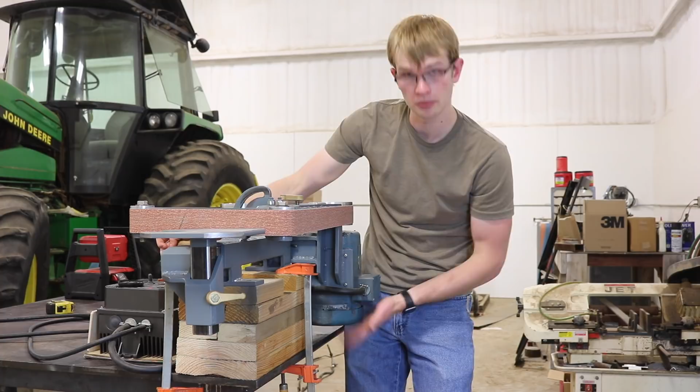I think it's time I build a dedicated stand for it. The signature feature of this grinder is that it can serve as either a vertical or a horizontal grinder, but because of that, the motor, which is direct drive on the drive wheel, has to swing down, as you can see here. So it needs some extra height in here.

About 3 options to deal with this. One is to just set it on top of blocks like this, although you could go with a little more professional blocks than just a stack of 2x8s. You could make the legs on the grinder longer so that you can mount directly, or the solution that I'm going with is to custom build a table that's notched out so that the motor has a place to swing.

Just to give you a quick look at the construction before we get started, it's going to be a front and back frame, nearly identical, just that one of them is notched for the motor. They're connected by a bunch of cross members.

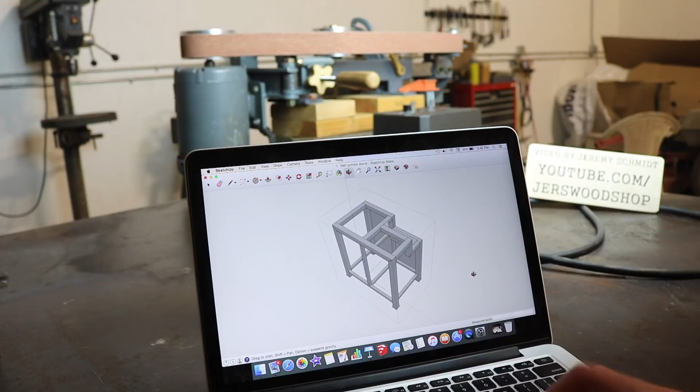On this corner where the notch is, that'll be skinned to keep dust out, and the back will also be skinned to add rigidity and keep dust out. The top will have a piece of 1/4-inch plate, and then in the front there will be 2 banks of wooden drawers. I'll mount my frequency drive up on a pedestal, as you can see here.

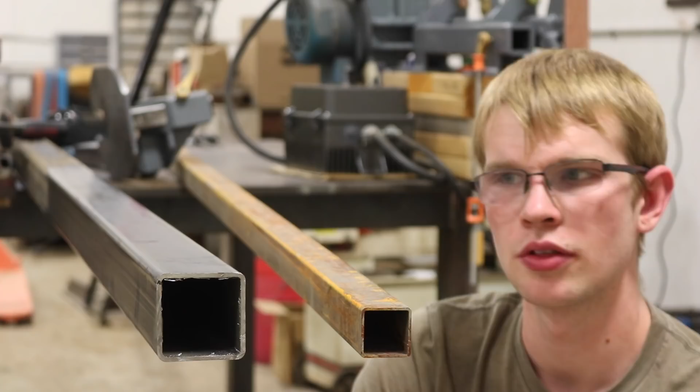The tube used for the main frame is 2.5-inch square tube, 1/8-inch wall, and then the secondary parts are made out of 1.5-inch square tube, 14-gauge wall.

To figure out how long you need to cut the legs, take the height of your table, in my case that's 40 inches, and subtract the thickness of the table top. I'm going with 1/4-inch plate, so that leaves me with 39 3/4, and then subtract the thickness of the feet on the bottom of the legs, if you're going to have any. I'm going to weld 3/8 plate on the end of my legs, so that will leave me with 39 3/8.

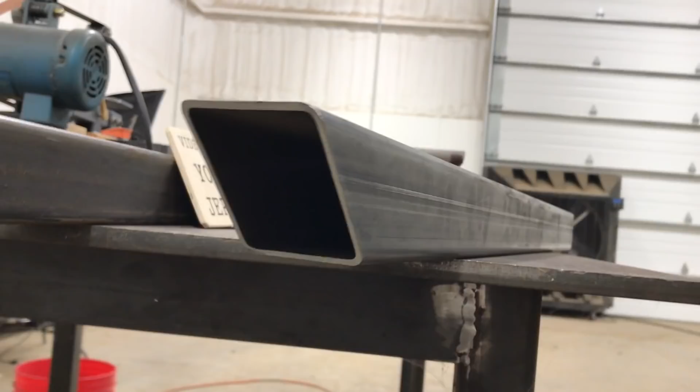After truing that up on the belt grinder, I've gotten it down to exactly 39 3/8. 3 of the 4 legs are 39 3/8, and the other one is 7.5 inches shorter. That's the one that goes on the corner with the motor notch, which is 7.5 inches deep.

Across the top here, I'm going to put a 38.5-inch long piece, and then down the middle there will be a smaller tube between the 2 banks of drawers, and then another tube across the bottom that'll keep these 2 legs from bending in and out.

Now the back frame will be mostly the same, but just a little different because the 2 don't line up. So it'll have to be a jogged piece across the top, and then the same piece down the middle and across the bottom.

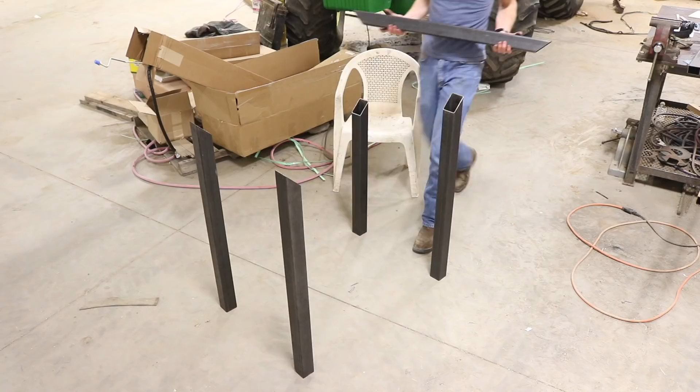I'm going to go ahead and weld up this front frame right now. Where these corners come together, if I just weld on top of that, I'll basically just get a little pile of weld. That's not ideal. So I'm just going to take and bevel these inside corners. And now I have a V-notch to weld in.

I'm taking my time and measuring to be sure the legs are parallel and square to the top.

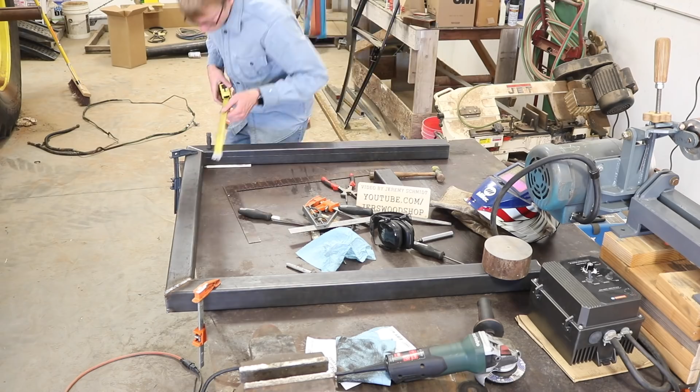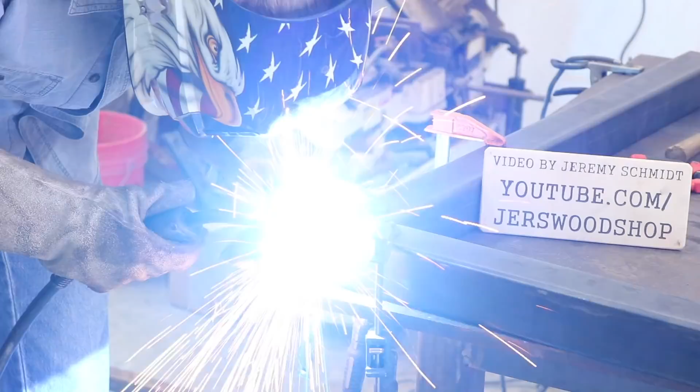Since I welded these inside corners first, the legs warped inward just slightly. They're about a 1/16 inch closer together at the bottom than they are at the top. So I cut this brace that goes across the bottom. I cut it so that it just fits at the top. Since that's the right length at the top, if I just force it in down here at the bottom, then that'll push those legs back into parallel.

So I just clamped these ends together with a piece of scrap metal to make sure that these faces are flush. Same thing on this end. And then I've checked to make sure it's the right distance down from the top and that everything's square. So we're ready to weld this up.

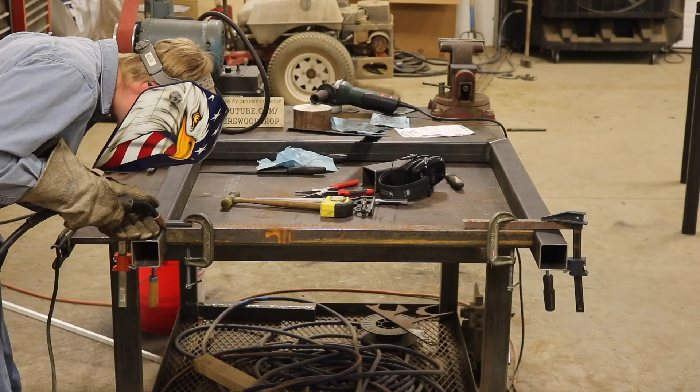Now the distance from the top of the bottom tube to the bottom of the top tube is 31 5/8. So that's how long I cut this piece, which goes here in the middle. It's important to make sure that this piece is exactly centered side to side.

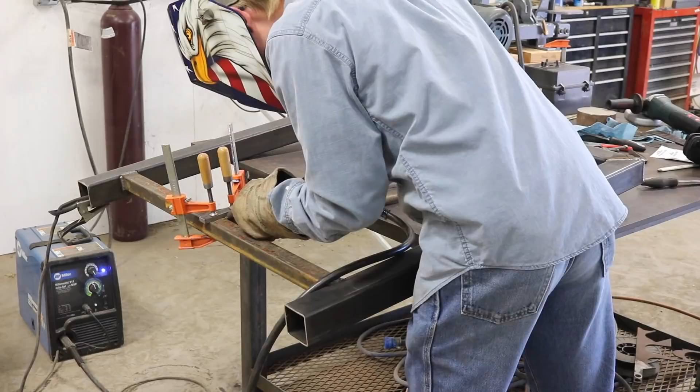Okay, that's the front frame all done. Now, like I said, I will be adding some feet on the bottom, but I'm gonna leave those off for now because they might get in the way. I'll add those later. You can see here where the two banks of drawers will go. And now let's move on to making the back frame.

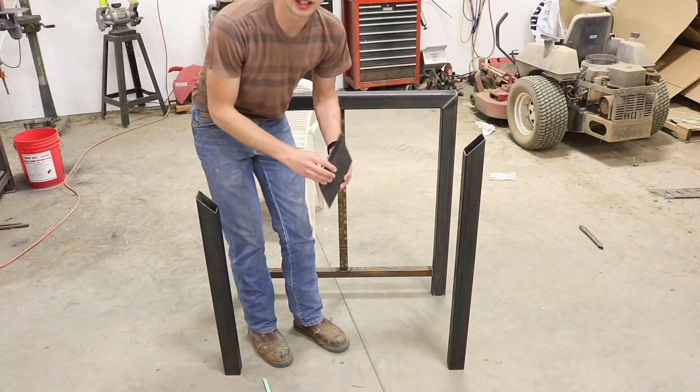I cut out this center jog piece, which is 7.5 inches from the top to here. Again, since the motor notch is 7.5 inches deep. You'll notice something about this. If I put it on top of this one, it makes this leg the same height as all the others. So it's sort of like I've just cut this piece off and scooted it over to here. And now I just need to make the piece to fill this in and this.

The distance from here over to here is going to be the same as the distance from this tube to this tube, since the same drawers that fit between these need to fit between these. This is 16 inches, and with 2.5 inches extra on each end, the top piece that I need to cut for here is going to be 21 inches on the long side.

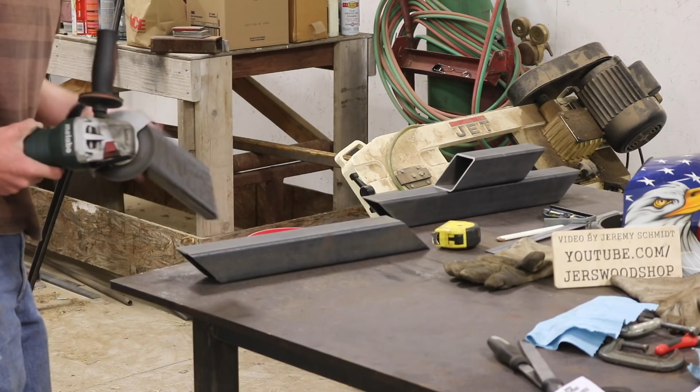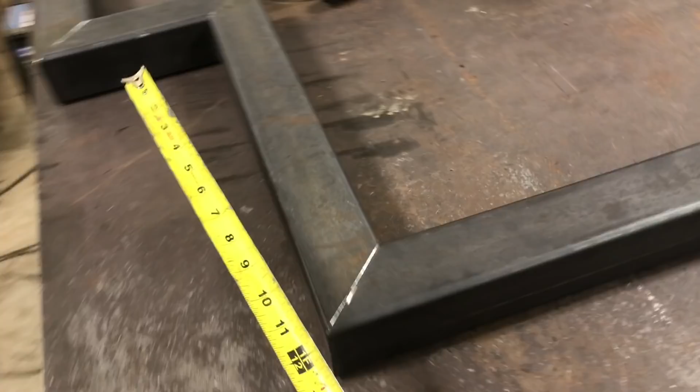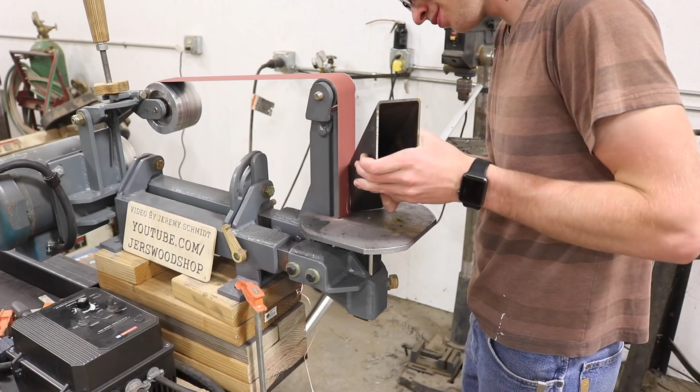So just to run through the dimensions of this one more time, this piece is 17.5 inches, and it'll be 20 inches overall. This piece is 7.5, 10 inches overall, and then this is 21 inches overall. The inside here is 16. And here again, I'm beveling those inside corners to give me a V-notch to weld in.

So now I just need to put in the 1.5 inch tube across the bottom and up the middle. Now the middle one is going to end right here instead of going clear up to the top. So it's 7.5 inches shorter than the one in the front. Again, I welded the inside corners first, so I have to jam this piece in.

So this is the piece that goes here in the middle. So I'll use that on this end to get the height right. And then once I have this right, I can use this dimension to make sure this end is the same. That way it'll be straight.

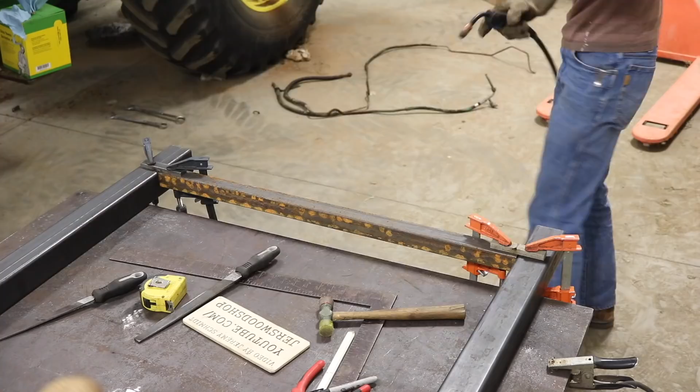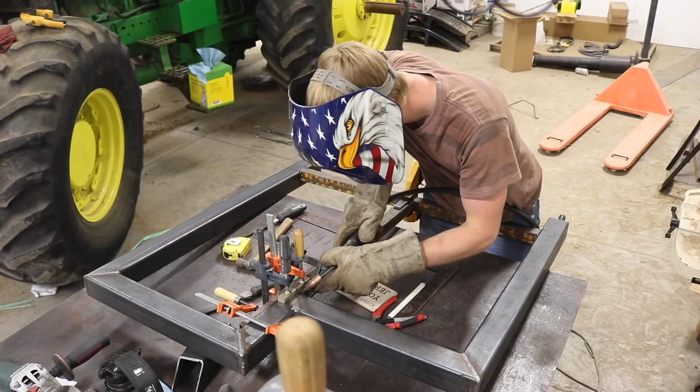So I have this end clamped up so that it's flush across the top and across the side back here. And then this end is centered and clamped so that these two are flush. After a few tack welds, I checked both sides to be sure they are 16 inches wide.

Notice that the 1.5 inch tubes on the front frame are flush with the front, but on the back frame, they're flush with the back. So now we're ready to connect those, so I just need to cut a bunch of 20-inch long cross members for the top and bottom.

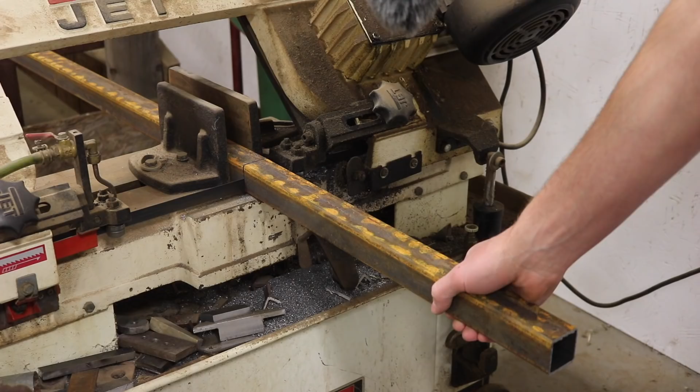So the two larger pieces go here and here. There will be another one going here, but that has to have a jog in it, so I'll need to custom fabricate it. The two smaller tubes go right here and right here. And then there's two of the smaller tubes that are cut slightly longer to go here and here. These are necessary to support the plywood panels that'll support the drawers. You'll see that in a bit.

I want to make sure that the front and back frames aren't twisted relative to each other when I weld these in. It'd be best to have a precision level, but I don't, so this is just a regular old level. It'll be close enough for this. It should be within a 32nd of an inch over the length.

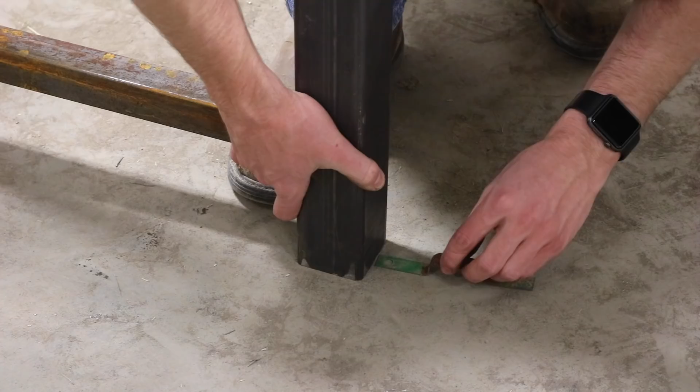Here I'm checking the diagonals to be sure that I have it sitting square, and then double checking the ends to be sure they're still 20 inches apart. All right, that's all nice and square.

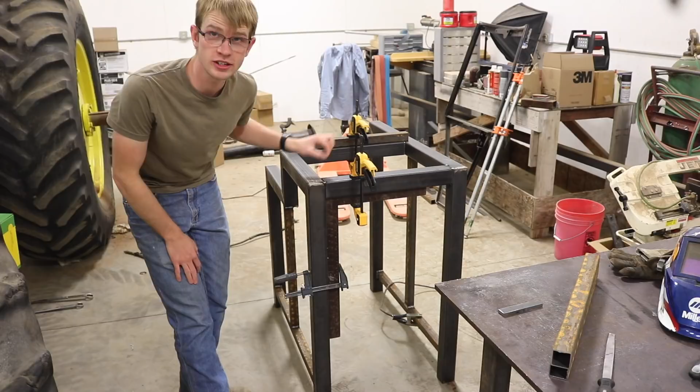I'm just putting a few tack welds here and there and then checking everything for square again. The more square this is, the better, because if it's out of square at all, the drawers probably won't work as well. It warped out of square just a little, but by putting diagonal clamps across it, I was able to pull it back into square.

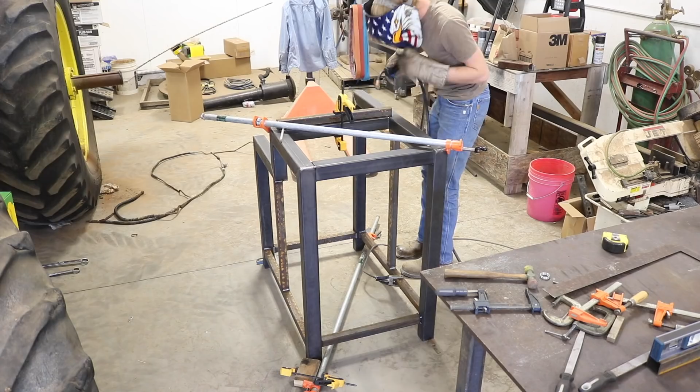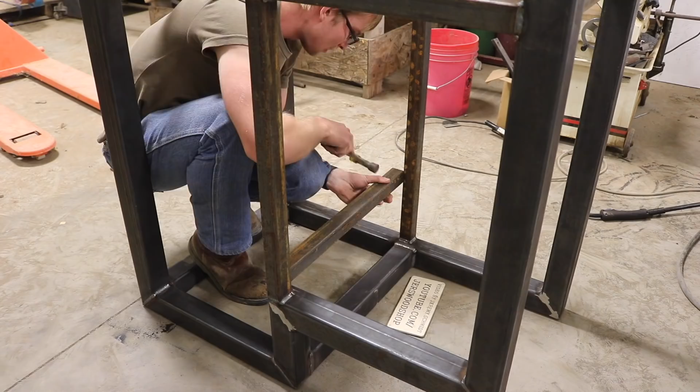So I've got these bottom ones tacked in place, and I'm gonna now tack this one in, and with that, it should be rigid. And just so you know, I am welding all of this stuff completely solid. I'm just not showing it because it takes too long in the video.

Just to help you see what's going on here, you can see there's a cross member right in the middle between the vertical in the front and back, straight across there. And there's another one between them right against the bottom of the jog. And those are there to screw plywood panels into.

We're also going to screw plywood panels into these sides. So that'll screw into the big tube on the top and on the front and back, and then into that little tube on the bottom.

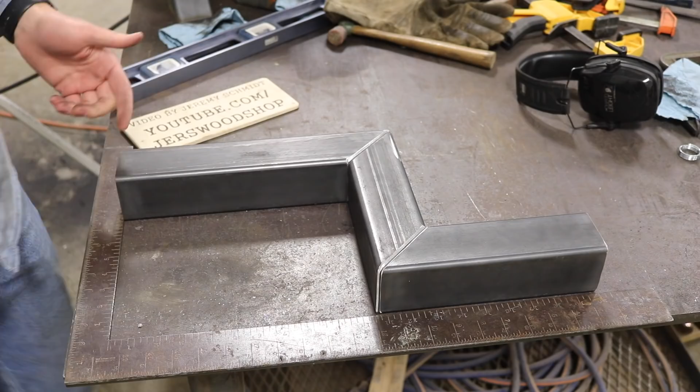So I'm working on this jogged cross member now. I've already cut all the pieces. The overall length this way, of course, is still 20 inches, just like the other cross members. And the height of this is 7.5. By that I mean 7.5 inches offset. It's 10 inches overall. This piece is 9.5 inches overall. And this piece is 13 overall.

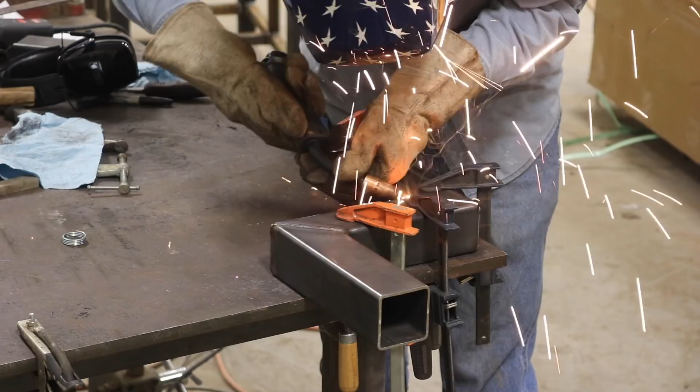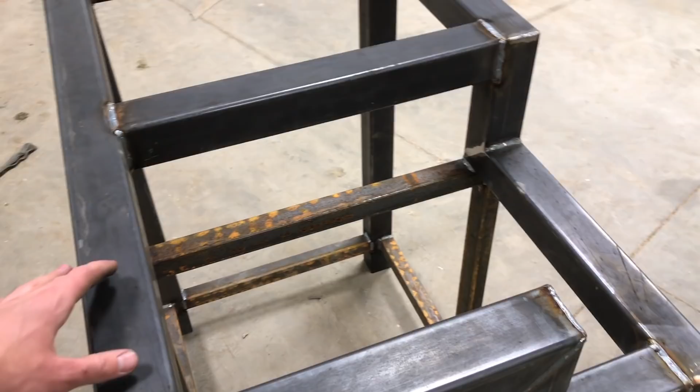The front foot of the grinder is going to sit right here, and then the back foot sits about here, so there needs to be a cross member between here and this tube. That cross member will be 15 inches long.

So now you can see the motor notch. If I put a plate on that side, a plate on the bottom, and a plate up this side, that will complete that. But there is one more piece I'm going to add here, like so. That's mostly just for looks.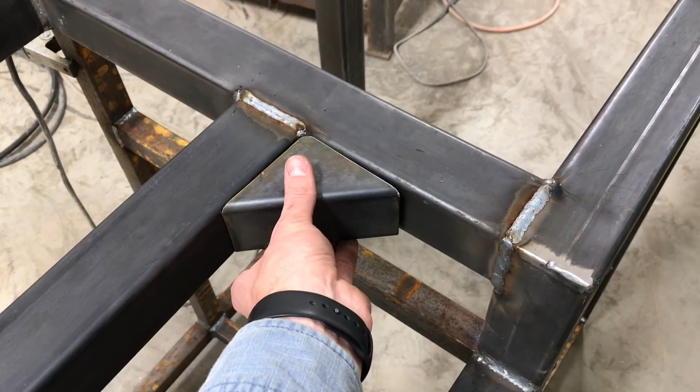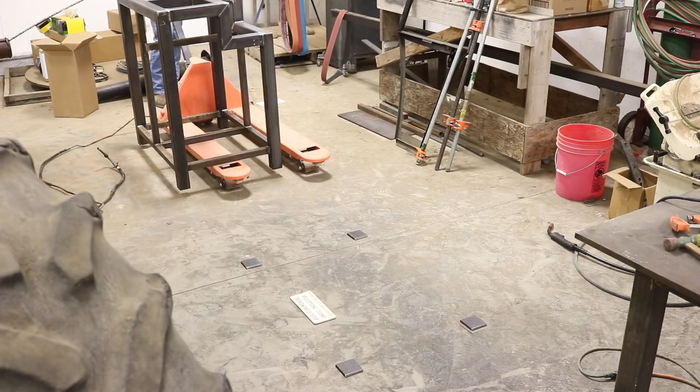I ground my welds flat everywhere where there will be panels, so that includes the inside where the plywood goes, the top, and the back. So I'm welding these 3-inch square feet on the bottom. If you wanted, you could certainly put leveling feet on this or casters. Just cut these legs a little bit shorter, weld them on the bottom.

In my case, I've got a way to move it, as you just saw. I don't like leveling feet. I prefer to just kick a shim under the corner. I can already hear you asking the question, why don't you like leveling feet? Good ones are expensive, cheap ones are wobbly, and pretty much all of them require tools. These are dirt cheap, and it doesn't take any tools to kick a shim under the corner.

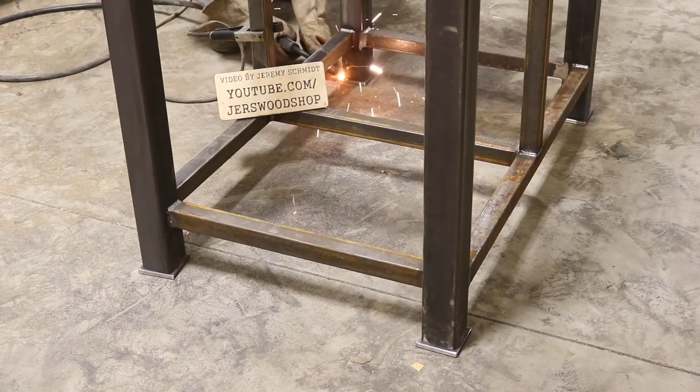So all the feet are attached. Now all we need to do is put the skins on the back and in this notch. This opening is 31 5/8 by 16. So I'm gonna cut the sheet to 17 by 32 5/8, so it overlaps a ½ inch all the way around. Then this one's also 16 wide, but only 24 1/8 tall. So I'll cut it to 25 1/8 tall by 17 wide.

Now, you can certainly make this in just one sheet to cover the whole back. I'm just making it in two because of how I plan to use the rest of the material that I bought.

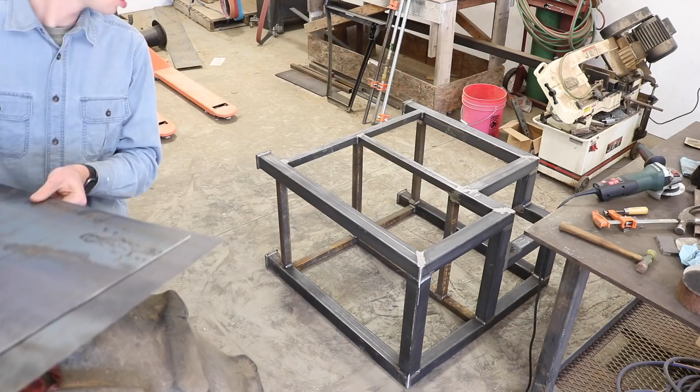To attach these, I could just tack them on all the way around, but that's not going to do a very good job of keeping the dust out. So I could tack them on and then run around it with a bead of silicone. That would keep the dust out, but it might not look as good, so I'm just going to weld it solid. In hindsight, the silicone would have looked better than my ugly welds.

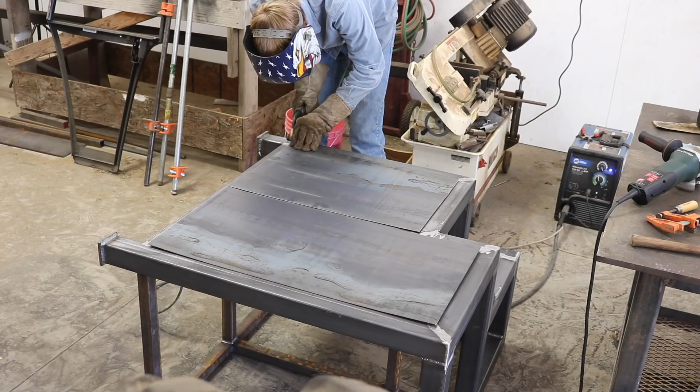Also, if you're just going to tack it on, maybe leave a little gap around the edges or something, because otherwise there's a risk of it vibrating and making a buzzing sound. See, you don't want that sound. Still pretty noisy.

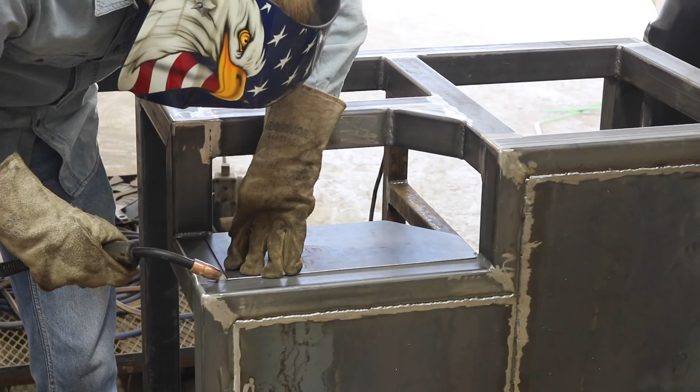So here's the piece I cut to fit in the bottom of the notch. You can see the corners are both cut out a little bit, and those are to fit around the welds. And this profile is the same as this. And I think I'm just going to try to bend a single plate around this. For this vertical piece, I need to bend it here and here.

Now, if I just clamp it in the vise and try to bend it, it's not going to look very good. So I'm going to score that with the grinder first. That'll give me a spot for it to bend. Since I've weakened the plate by grinding grooves in it, there is certainly a chance that it'll crack along those grooves. But I'm just going to hope for the best. If it cracks, I can weld it up then.

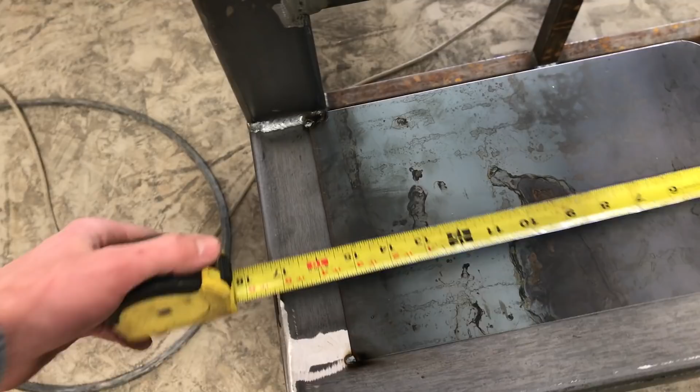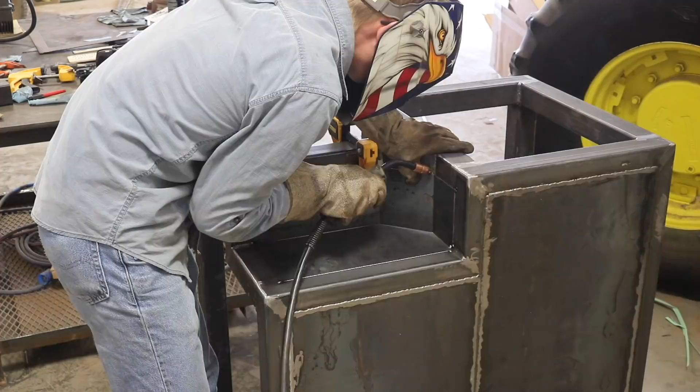This bottom piece is 15.5 by 7.5. This piece ended up being about 20 3/4 along its length before I bent it, and it's 5.5 inches tall. So I'm going to paint this with this Dupli-Color machinery gray, it's called. It's the same paint as I used on the belt grinder.

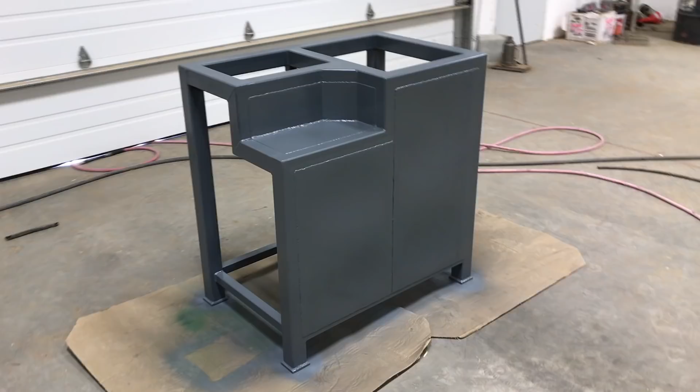As a refresher on how my modular drawer system works, the drawers are all built on a 1.5 inch increment. So this is a 3-inch drawer, this is a 1.5 inch drawer, another 1.5 inch drawer, and in here we have a dado cut every 1.5 inch. So as long as all the drawers are built on that same increment, any drawer will fit anywhere.

My tool stand is going to be built the same way, so I need to cut plywood panels for the sides that have a dado every 1.5 inch. This is 3/4 inch Baltic birch plywood, but any good quality cabinet grade plywood will work fine for this. I cut my 4 panels, and now they need to be notched out in the corners to fit around the horizontal tubes. So I'll go ahead and notch them, and then I'll show you what I mean.

So here you can see why I needed to notch the corners out. And also I chamfered the inside here so that it would clear that weld. These panels are 33.5 tall by 23.5 front to back. And I'm gonna start all 4 panels out at the same size. So the panel that goes here will be identical to this one. And then the 2 that go in this spot will have to be customized a little because of the motor notch.

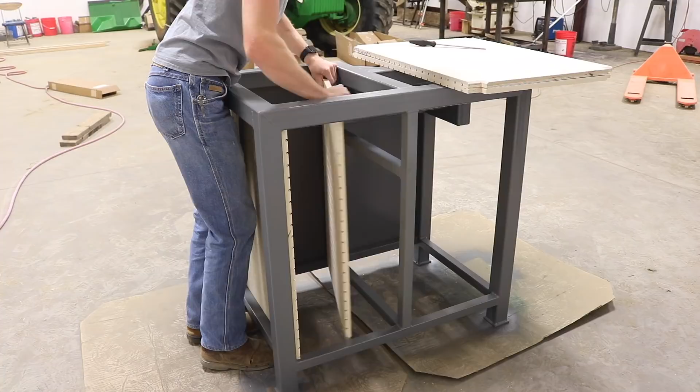Since the notch in the corner is 7/8 inch tall and this dado starts 1 inch up from the bottom, that means the bottom of the drawer will clear this tube by 1/8 inch. And then if everything's the right size, you should have 1.5 inches from that tube down to the bottom of this dado. So with those 2 fitting, it's time to customize the ones for the notch side.

Now you can think of this notch as if I've just taken this top piece, cut it, and scooted this part down by 7.5 inches. Or you can think of it as taking the leg, cutting it, and scooting it over by 9.5 inches, since the notch is 7.5 by 9.5. So what I'm going to do to customize this is take this profile and push it over 9.5 inches to here. And I'm going to take the top profile and push it down 7.5 to here.

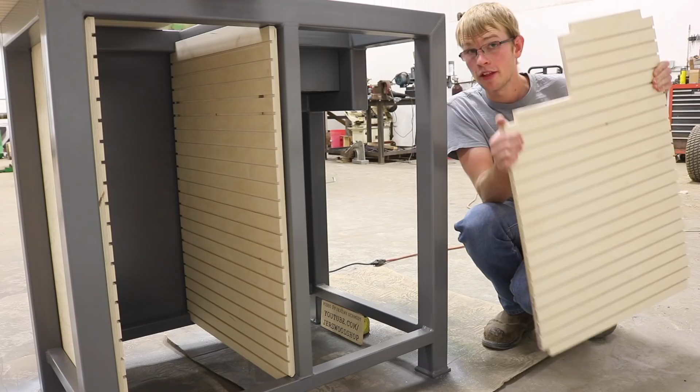Ignore these lines, they're not right. This panel should fit now. Nice. The panel for the left side of the right bank of drawers is pretty much identical to the right one, except that it's mirrored, but there's one other difference. Instead of being cut out here, it's just cut straight all the way across the top.

With all of these other panels, they're notched out around these top tubes because this part can actually be screwed onto this big tube at the top. You can see here, but for this panel, that's not possible because this tube actually sticks out. You can see from up here, it's flush on this side with this tube, but it's 1 inch out on this side. So that panel just has to stop against the bottom of this tube.

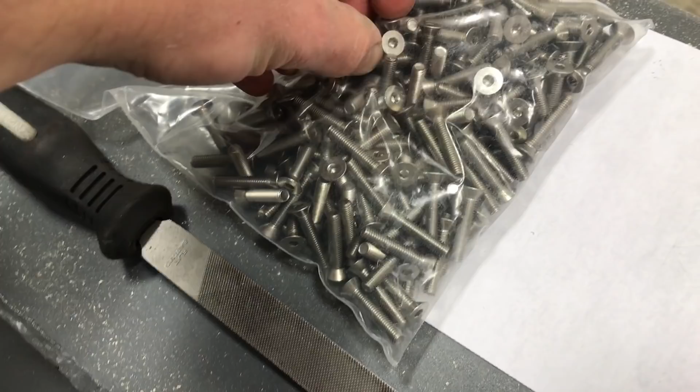I got all 4 panels installed and fitting correctly. So now it's time to screw those in place, which I'm going to do with these little 10-32 by 1 inch countersink head screws. I marked out where I want to put the holes all the way around this piece, about every 6 or 8 inches. And now I'm going to countersink those. I'll countersink them first, because if you drill first and then countersink, then the countersink chatters.

So I'll countersink first, then come back and drill all of these with the drill press, and then I'll go install this in the tool stand and use it as a template to get the holes in the right place in the steel tubes. Okay, tapping for a 10-32, we need a number 21 bit. I clamped the panel in place to be sure it doesn't move, and now I'll use that number 21 bit to drill through the tube in each of those locations.

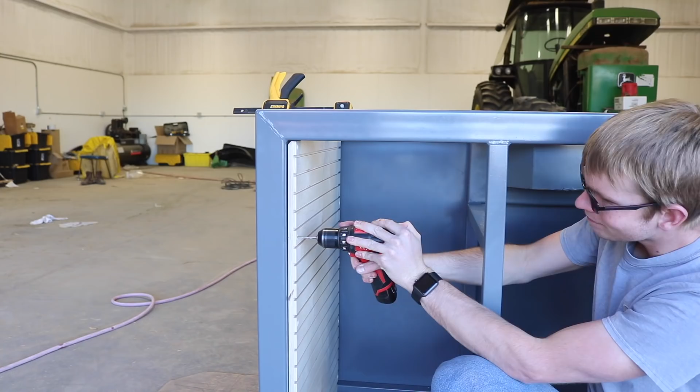I put this panel in behind me so I can push back against that. That way it's easy to drill forward like this. Although I could also see it might work to lay the whole thing on its side so you could drill down instead of sideways. I decided to try that idea, and I ended up using this method for all the rest of the panels. It's a lot easier than crawling inside the cabinet.

This is a spiral point tap, which means you don't need to back it out to clear chips, so it's well suited to running in a power tool. The most important thing is to keep it straight. Now that these holes have finished serving their purpose as pilot holes, I can use a drill bit, which is bigger than the major diameter of the screws, to enlarge them so that the screws fit.

Okay, all 4 panels are screwed in place. Now on to making the drawers. Every drawer needs to be able to fit everywhere since they're interchangeable, which means every drawer needs to be able to fit in the narrowest spot on here without binding. The way to determine where that narrowest spot is, or rather how wide it is, is to just cut a panel and try it in every spot. If it binds, cut it down and try again until it doesn't bind.

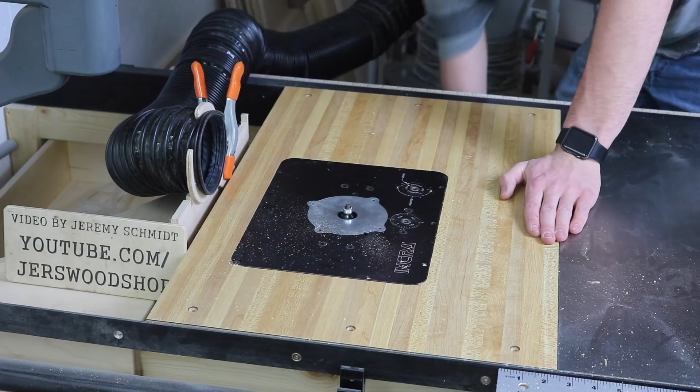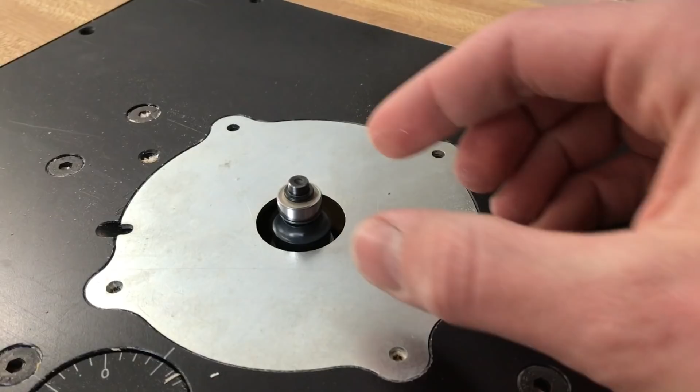All right, all of the components of the drawers are done and ready to glue up. I did run over the top edges of the sides and the backs with a roundover bit as well. All the edges that I'm going to frequently touch are rounded over. The part of these fronts between the notches on the ends is the same length as the backs. So I'm going to put the front down upside down. The whole thing's assembled upside down.

Now this is the side. Put a little bit of glue on the end. And on this side, I can set that right into the corner like so. And I'll put 2 staples in this side. And now I'll do that same thing to the other side. Now moving on to installing the backs. This is quite simple. They just go flush across these back edges.

To install the false backs the right distance away from the back, I cut this 4 1/4" spacer. Goes in here. That goes up against there. So now we need to attach this frame onto the bottom. And the easiest way I've found to do this is to flip the frame over, put glue all the way around. And I'll set this on here at approximately the right spot and try not to smear the glue around. I center the frame side to side on the bottom, so that should be about a 5/16 offset on each side.

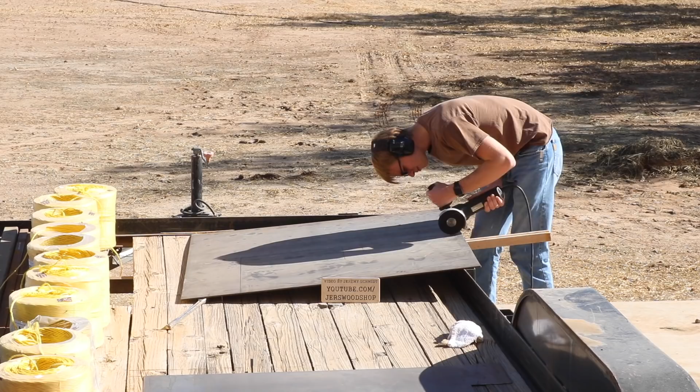I used the grinder to cut out a piece of 1/4 inch steel plate for the top. This is just the exact same shape as the top profile of the frame. And then I painted the edges and the bottom side of it to prevent rust, but I did not paint the top since it's going to be a work surface. It'll get beat up if I do.

So I went with a piece of 1/4 inch steel plate for the top. That's not necessary, but it only cost about $40. If you went with plywood for the top, you'd probably need to replace it every couple years because of it being beat up, and once you replace it 2 or 3 times, it's going to cost you as much as the steel did. You could go with a thinner piece of steel, but then you run the risk of it sounding tinny, and we don't want things to sound tinny.

So I'm going to go ahead and screw this down. I think I'll just use the same screws, maybe a few more of them than I did in the plywood sides. And I'll use the same method. I'll drill through both to get the holes all lined up, tap the ones in the tube, and drill out the ones in the top a little bit bigger.

Oh, and we also need to drill some larger holes where the grinder mounts and where the VFD pedestal will mount. You'll see that pedestal later.

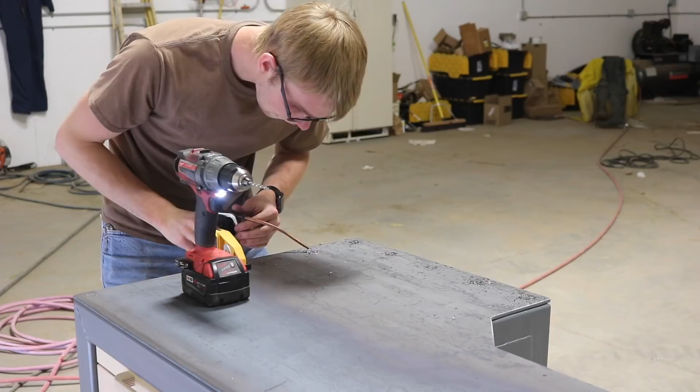I'm using that number 21 bit again to drill through both the top and the frame. Can I borrow your mag drill?

I drilled a hole every 4.5 inches, 1 1/4 inch in from the outside edges.

All right, that is all of the small holes. Now there's going to be 6 holes that hold the grinder and that VFD pedestal that I was mentioning. So I need to drill those with a 5/16 bit and then tap them to 3/8.

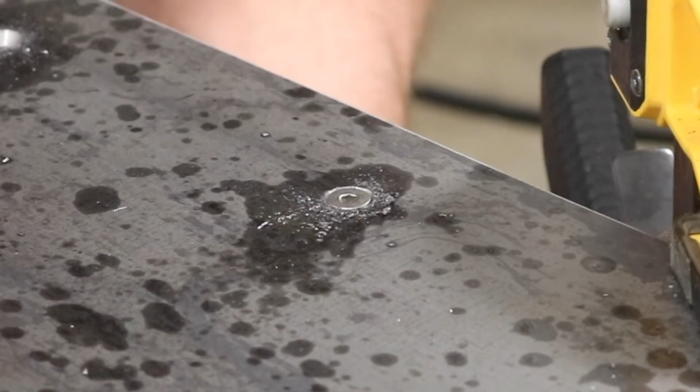Here I'm enlarging the holes in that 1/4 inch top so they're big enough for the screws. I countersunk those holes so the screw heads fit flush, and although I failed to get video of it, I also drilled out the 5/16 holes to 7/16. In the frame, I tapped out those 5/16 holes to 3/8-16 so I can use 3/8 bolts to hold down the grinder and the VFD pedestal.

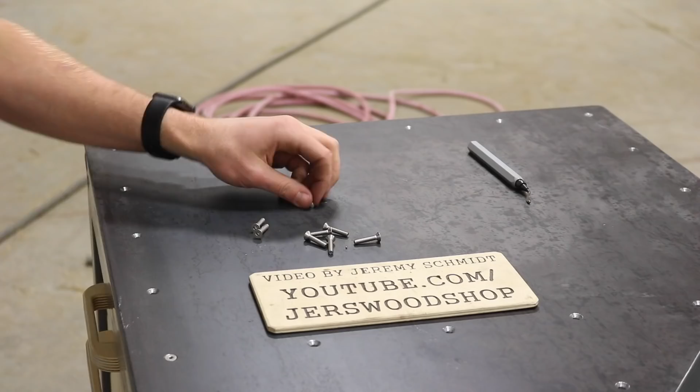And then I went around and tapped out all of the number 21 holes to 10/32. I put one of the 10/32 screws about every 4.5 inches, which seemed about right considering they're pretty tiny screws, and I really like how all the screws look.

And now, finally, we're ready to mount the grinder. Right here, I almost knocked the grinder off its blocks. Be careful handling this grinder - it's kind of side heavy and back heavy and just all around awkward.

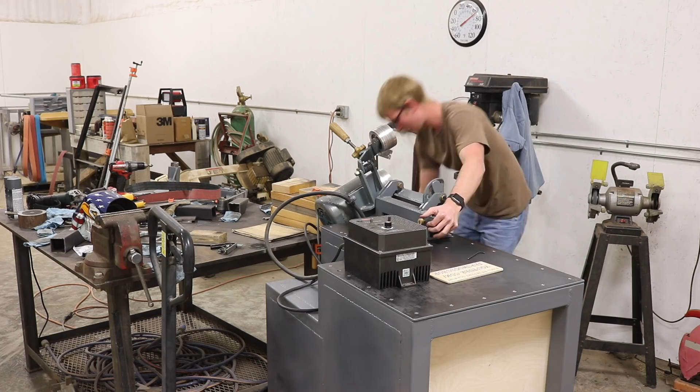Needless to say, it relieved my anxiety to screw a couple of bolts into it. There aren't any threads in the 1/4 inch steel top, so these are just threaded into the tube below.

Until now, the frequency drive was always just sitting here beside the grinder, and that's not the greatest thing because it can move around, so I need to mount it somehow. I was thinking a pedestal that would hold it up here would be just about perfect.

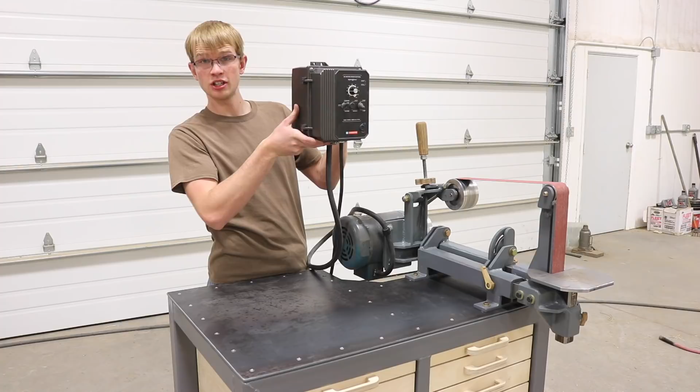Now, you can mount this box down underneath out of the way somewhere and just remote control it - basically take these controls out and put them in a separate box. But I don't see any reason to do that in this case. I could just mount the whole thing up here, and that way it has plenty of air for cooling.

I have a design for the pedestal, but I don't know yet how high I want it, so I'll have to determine that right now. That feels a little high to me. This is the height that I like the best, roughly shoulder height, maybe just a little higher.

I recommend you do this - go ahead and clamp it so that you can determine what you like best. But one other thing to keep in mind is this: you want that to clear.

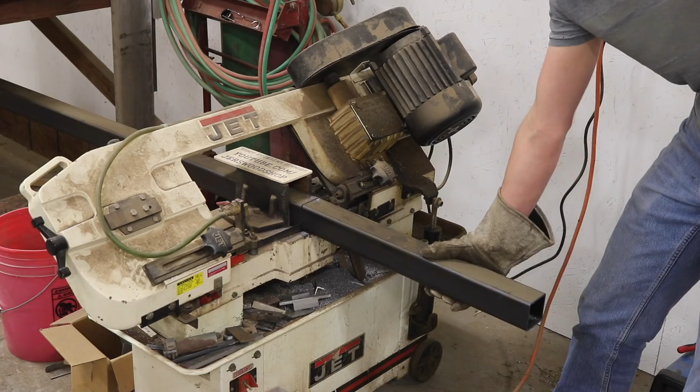So the height from the table to the top of this, in my case, is 24 inches. This piece is cut to 24 inches long, and then the top of it is just angled off a little for looks. So here's the pedestal.

The VFD will mount onto this, but we need to mount this down to the table with these two 3/8 bolts. So I need to cut just a little plate that I can weld onto the end of this to bolt down.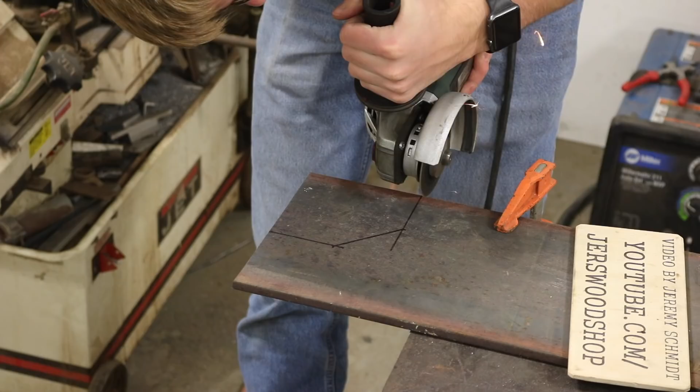These bolts are each positioned 1 1/4 inches in from the edge and 3.5 inches in from the opposite edge. Now this plate that I just cut for the base is just 1 inch bigger than that in both ways, so it's 4.5 by 4.5. And then this corner is cut off at an angle 2.5 inches from these sides. Now I'm going to drill the holes in here to correspond to where these are.

If I just weld this tube onto the base, it's going to warp the base a little bit, and then when I bolt it down, it'll pull the tube over and be crooked. So I've cut these triangles. I'll tack weld all of that together before I weld it solid, and then everything should stay square. And it'll make this a little more rigid too.

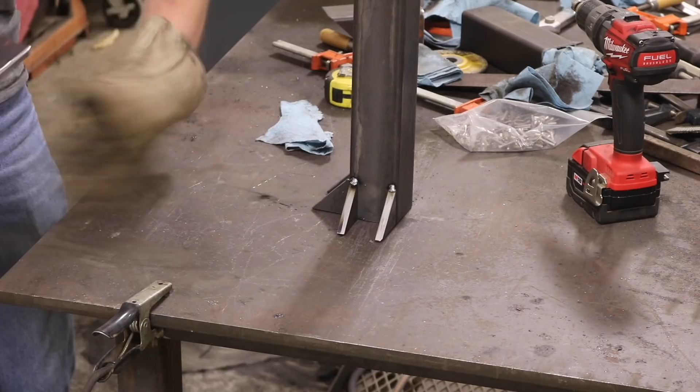So now up here at the top, I want to put a cover on that just to keep the bees out of there. That's going to be cut out of that same 16 gauge that I used on the back of the cabinet.

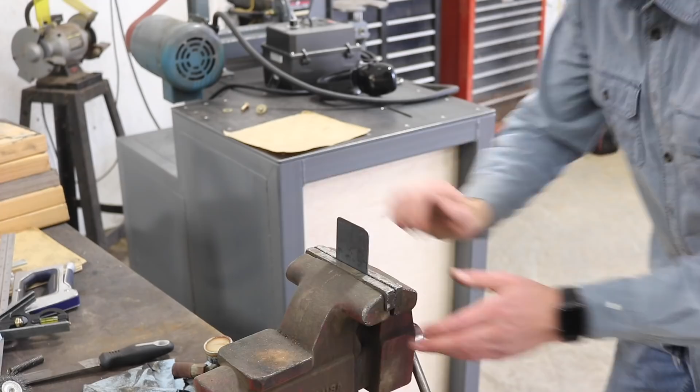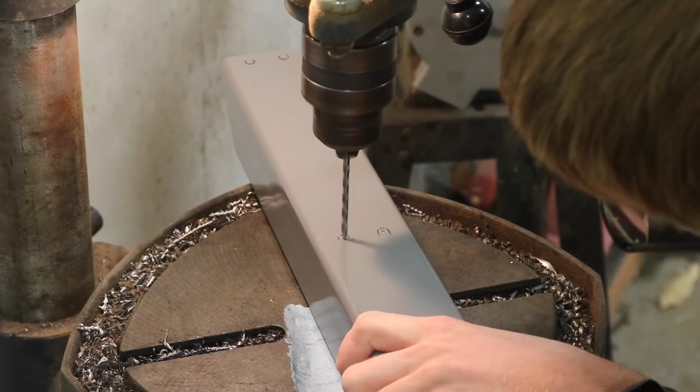So now I'm ready to mount the frequency drive here. I'll just set it on there and mark where I need to drill. I'm going to go ahead and mount the post, and then we'll tap those holes and mount the VFD.

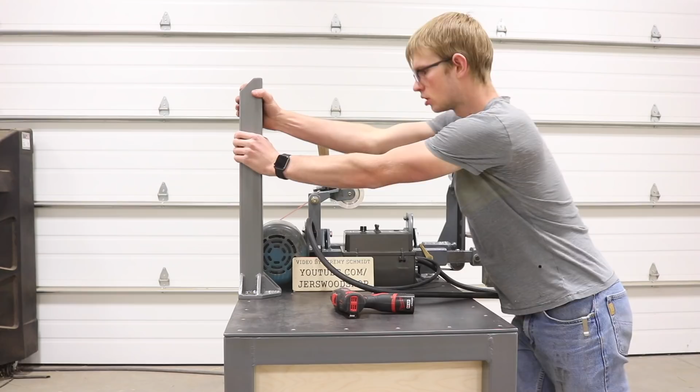That's nice and rigid, so now I can take that 10-32 tap. I'm going to hold the drive in place with these little 10-32 button head screws. The bottom holes on here are actually slots, so I can just set it on there and then use a screw in the top to hold it in place. It's done!

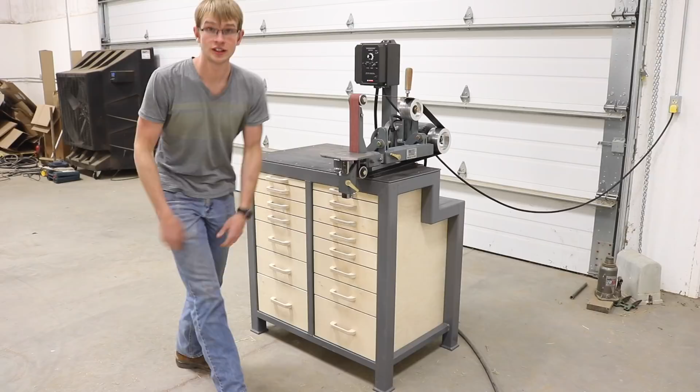Honestly, when I started this project, I wasn't very excited about it because it was just one of those things that had to be done. There was nothing acceptable about having this grinder on top of some 2x8s. And then I thought, well, if I'm doing it anyways, I might as well put some storage under it. But it's turned out to be one of my favorite projects yet.

The 1/4-inch thick steel top is going to be a lot more useful work surface than I had thought it would be. In fact, I kind of want a whole workbench like this. This is really nice.

This position for the frequency drive is way better than having it beside the grinder. The height of the grinder is much better than it was. Before it was about 4 inches higher, so the table was right here. This is way more comfortable, about elbow height. And have I mentioned how nice it is to finally have the grinder nice and rigid?

I kind of knew what to expect out of the drawers because I already have a bunch of drawers pretty much identical to this. But yeah, they're everything I expected.

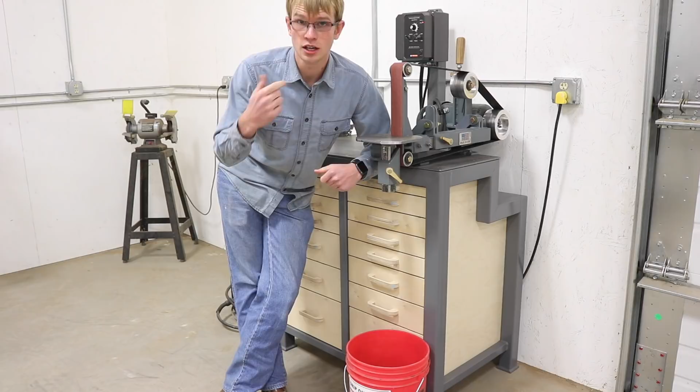One of the advantages of making 2 videos is that I can answer common comments from the first video in the second one. So the most common comment I've gotten on the first video is about dust getting in these drawers. So I'm gonna grind off 1 cubic inch.

This is a piece of 3/8 by half flat bar. I'm gonna grind it back to here, which is 1 cubic inch of steel. I'm gonna turn that all into powder and just see where it all goes.

I think it should be fairly obvious there's going to be dust everywhere. This is a very dusty machine, so that's going to happen. But I want to see how much dust gets in the drawers. Of course, I'm going to be storing attachments and belts and stuff for this grinder in these drawers, so they're going to be things that get dusty anyway when they're in use. So if dust does get into the drawers, I'm not super unhappy about that, but let's see how bad it is.

I've seen a piece of wood take a direct blast of sparks for long enough. I'm really not concerned about the sparks damaging the wood. They're hitting with a very low angle of attack.

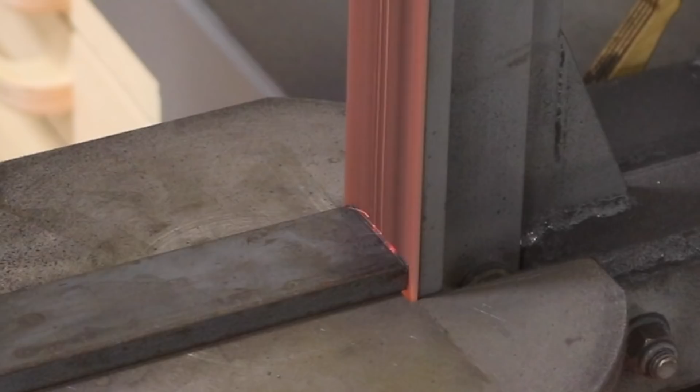And just as I finish, the belt broke. That looks very intentional, but I promise it wasn't. So, that's a full cubic inch of grinding done. Let's look at where all the dust went.

I think it's fairly obvious the majority went in the bucket. Quite a bit of dust does build up on top of these handles, which I don't really like, but I don't know what to do about it. Definitely some down here on the floor and on that side rail, and a lot of dust here and some in the notch. But what we're interested in is inside the drawers.

So a fine little powdering of dust there. Looks like we got a little bit on this slide. What about in this drawer? There certainly is some dust in here. Not terribly much. I am a little bit concerned about this on the edge, if that gets blown in there.

That is pretty much clean. Close to it anyway. And like I said earlier, these drawers are going to be storing parts that are used on the grinder, so the parts stored in here are gonna get dirty anyway. Yeah, these are all looking good. Almost nothing in these bottom drawers. So, not bad. Better than I thought it would be.

I was also concerned that it might make a little more noise, like it might rumble because of the vibration of the grinder. And it does very slightly. I think it makes about as much noise now on 50% as it did before on 60%, which isn't much difference. So yeah, overall, I'm just super pleased with how this turned out, and I'm gonna get a ton of very good use out of this.